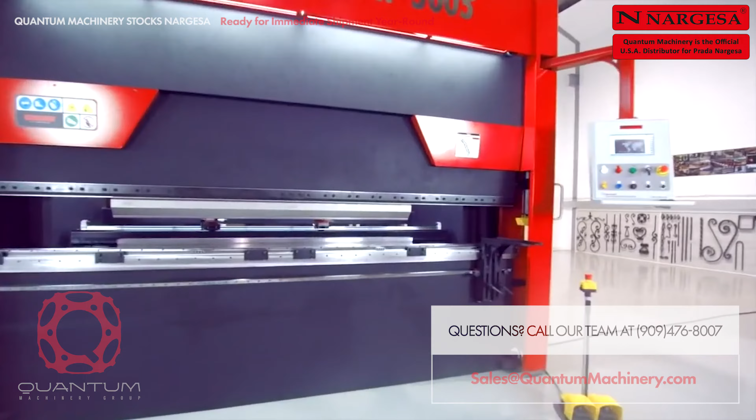Welcome to the new Nargesa folding tutorial video. We will show you how to make different parts and types of bending, such as air folding, deep folding, folding without marks, and even metal sheet rolling or calendaring.

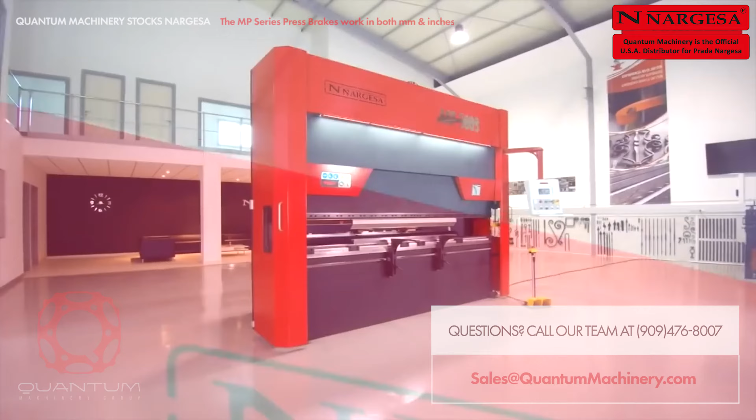We will also demonstrate how to choose the punches and dies, how to program the CNC, and how to interpret the folding tables, along with the points to take into account to achieve optimal folding operation.

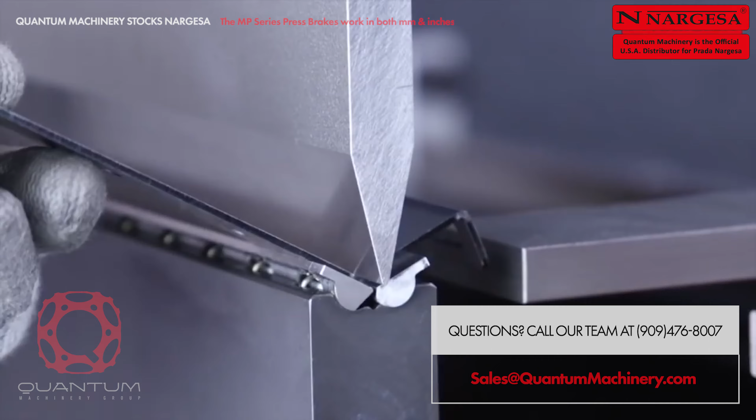All Nargesa machines have been designed, machined, and assembled in our facilities under strict quality controls.

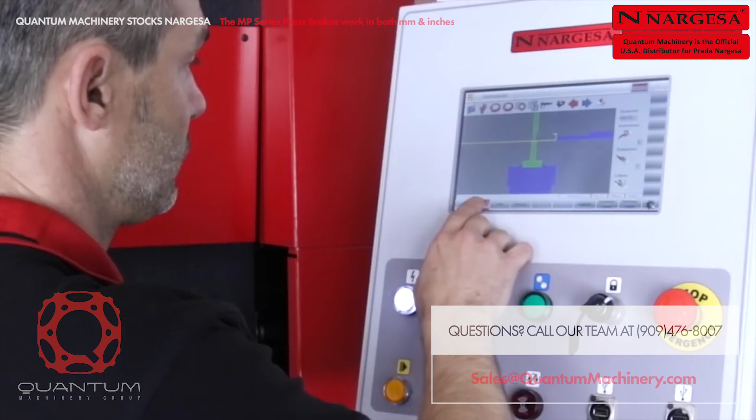We will begin this tutorial clip showing how to obtain this 6-part fold, all of them at least 90 degrees. Before starting to fold, it is essential to check this chart to determine the opening of the die that we must use. In this case, we know that the thickness of the sheet, indicated with the letter E, is 2 millimeters.

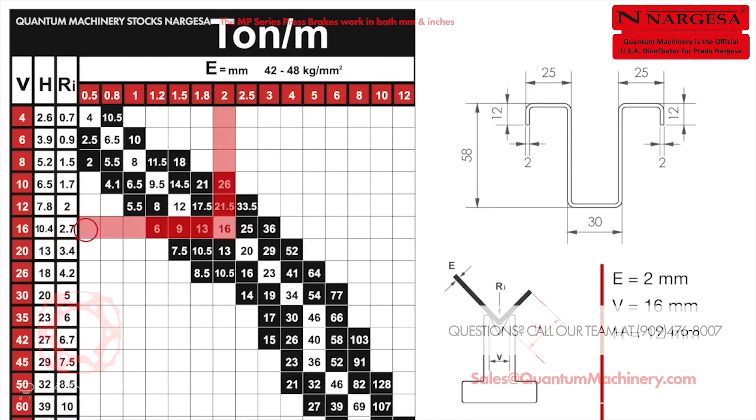For this thickness, a V of 16 millimeters is to be used. The letter H indicates the minimum folding flap, or minimum folding length, 10.4 millimeters. In this case, it is enough, since the minimum flap of the piece is 12. The letter R indicates the theoretical internal radius that we will obtain.

With 1 meter length, we will need 16 tons to make the folding, bearing in mind that it is a mild steel sheet, with a hardness of 45 kilos per square millimeter.

Now we select a punch that allows us to make this geometry. If the punch or the die that we have chosen does not allow us to make the part we need, the control of the machine will indicate a breakdown or collision as soon as we make the program run.

To create the program, we select New Program, New Graphic. Then we fill in the fields with the data we have taken from the drawing and the chart. We know that the width is 1,000 millimeters and the thickness is 2 millimeters.

As for the resistance of the material to bend, we will select values between 31 and 50 to work iron or carbon steel. Normally, it is 45 kilos per square millimeter.

We choose a die out of our library based on the marked requirements. For these parts with little distance between bends, it is advisable to use a die in T, because it is higher and narrower, so it will avoid collisions.

The reference of the die gives us all its features. The first figure tells us its height. The second one indicates the opening of the V, and the third one, the minimum degrees of the fold. We put it in.

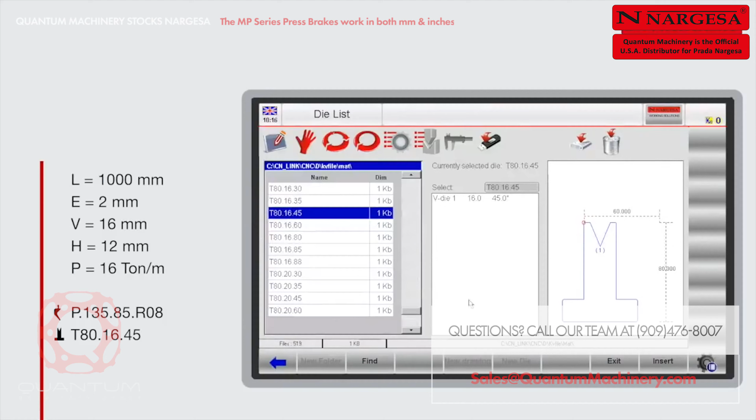Then we select the punch, taking into account its characteristics. The first figure indicates its height. The second tells the minimum degree of the fold, and the third, its radius. We insert it.

We begin to insert the dimensions of the geometry by one of the two ends of the piece, with the links indicated in the drawing. We insert the information in the fields in the upper right part of the screen. By default, it shows a distance of 20 millimeters vertically.

We press the up arrow on the CNC to indicate the direction of the first section of the piece and enter its height into the field L, 12 millimeters.

The next section is towards the right. We indicate it with the pointer by pressing this arrow. We introduce its dimension in the field L, 25 millimeters.

The next section is down, indicated by the cursor arrow. We introduce its size in the field L, 58 millimeters. We press the arrow to the right and introduce 30 millimeters in the field L.

Then we proceed with the arrow pointing upwards, 58 millimeters. We continue with the arrow to the right, 25 millimeters, and finally, down, to 12 millimeters.

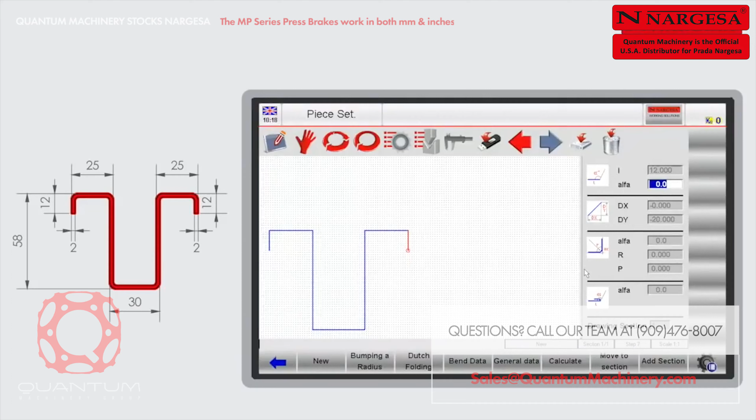Then we press the Calculate button, and the simulation appears on the screen. We press Optimize, and the CNC performs the calculations to find the optimal solution, avoiding collisions and reducing the number of operations. The CNC will indicate when it finds the solution.

We confirm and press Simulate, so we can visualize the whole process in the simulator step by step.

It also shows us the development, which means the total length that the sheet to fold must have, the number of upsettings, and the rotations that we will have to make during the folding process.

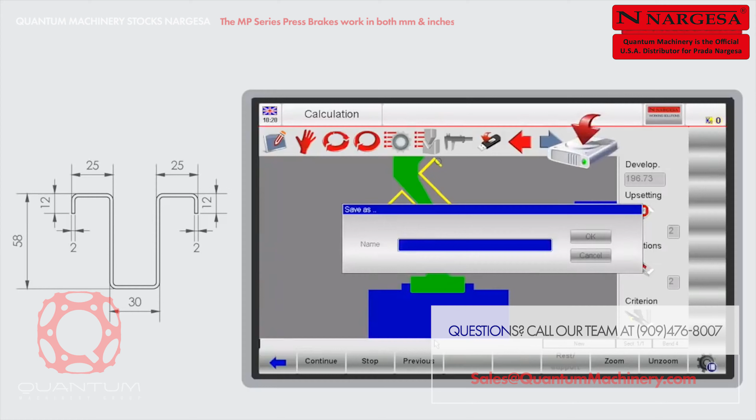We save the program with the name Demo 1. We accept, then we press the button Programming to display all the features of this part on the screen.

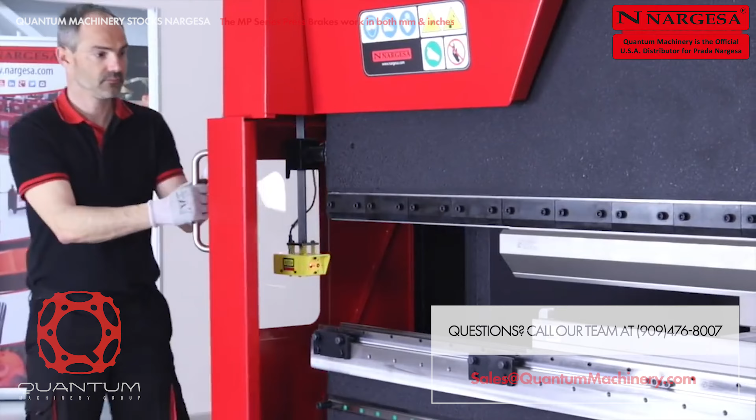We place and fix the punch and die to the press brake. We adjusted the lasers 8 millimeters below the punch as a safety measure. We unlock the emergency stop button, reset the safeties, and operate the machine in manual mode. For achieving a proper operation and durability of the punch, it is essential to fix it correctly.

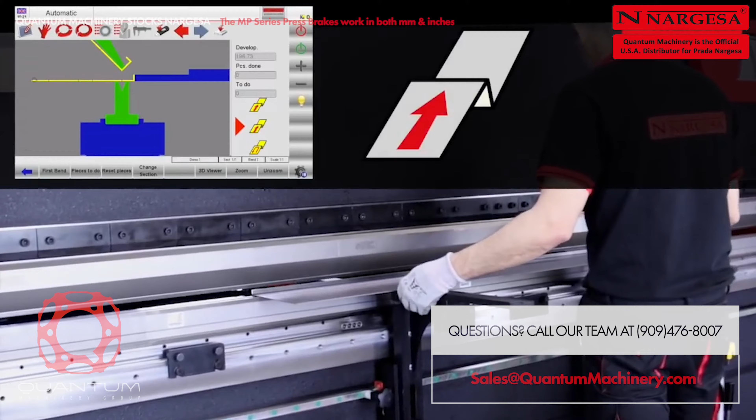We activate the machine in automatic mode to execute the program. As we make the folds, the screen shows how to place the metal sheet for the next operation. This symbol indicates that we introduce the plate by the same side that we are already folding. We continue on the opposite side of it. To finish, we rotate the piece, introducing it by the same side that we are working.

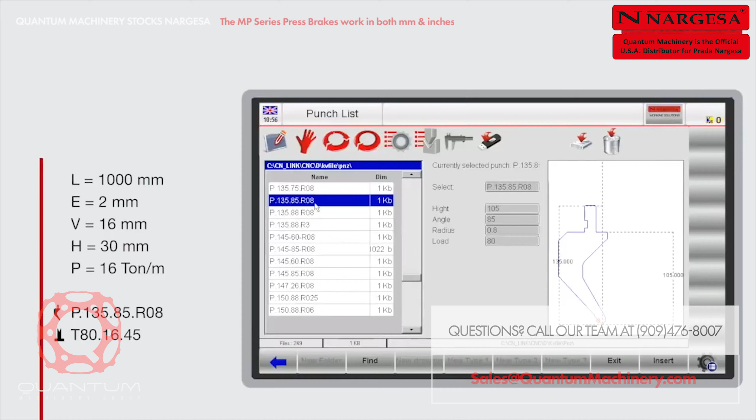We choose the same die and the same punch as in the previous parts because the minimum distance between folds is still small. We confirm. Then, we put in all the sizes of the geometry in the corresponding fields.

We will start at the bottom end of the piece. We insert the dimensions of the first section, 50 millimeters. In the cursor window, we press the down arrow to indicate the direction of the fold and enter its height in the field L, 30 millimeters.

The next section is to the left. We indicate it with the cursor by pressing this arrow. We introduce its dimension in the field L, 110 millimeters.

The next section is up. We indicate it with the arrow. Next, we introduce the dimension in the field L, 185 millimeters. We press the arrow to the right and introduce the 110 millimeters.

We proceed with the down arrow, 30 millimeters. Finally, with the arrow to the left, 50 millimeters.

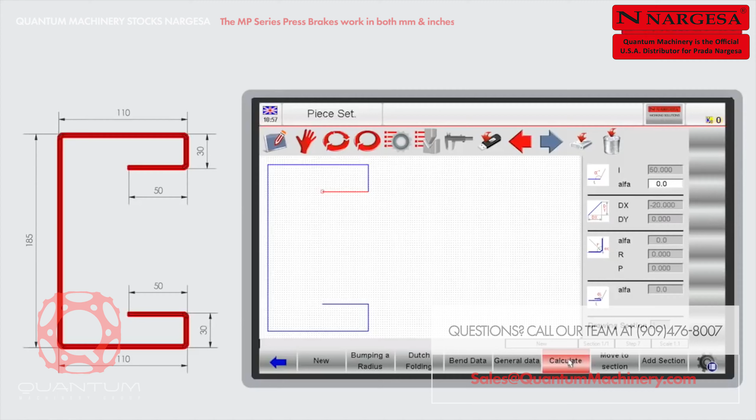Now we press the button Calculate, and the simulation appears on the screen. We press Optimize, the CNC finds a solution, and we confirm. Then, in order to see the whole process, we just press Simulate, and it will run from the very beginning.

The development will allow us to know that we must cut the metal sheet to 541.73 millimeters to be able to fold this piece with these dimensions. In the process, we will make one turn and one rotation. We save the program on the disk with the name Demo2. We confirm. Then we press the button for Automatic Mode to execute the program.

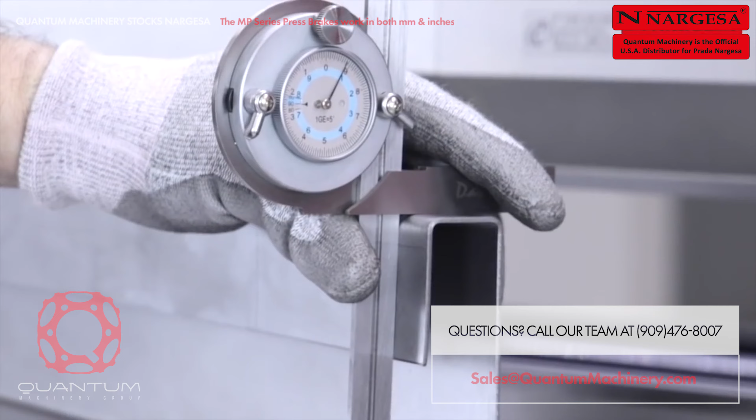There will be some moments, and due to the tolerance of the materials, when it is possible that the folding angles need a correction. To correct this disparity, we will insert, in the corrections field of each fold, the number of degrees that we need to correct.

In this case, all the folds have been at 91 degrees. We will enter the value 1 negative in the first fold, and we will use the arrow in the menu to go to correct the next fold and so on until we have the 6 bends corrected.

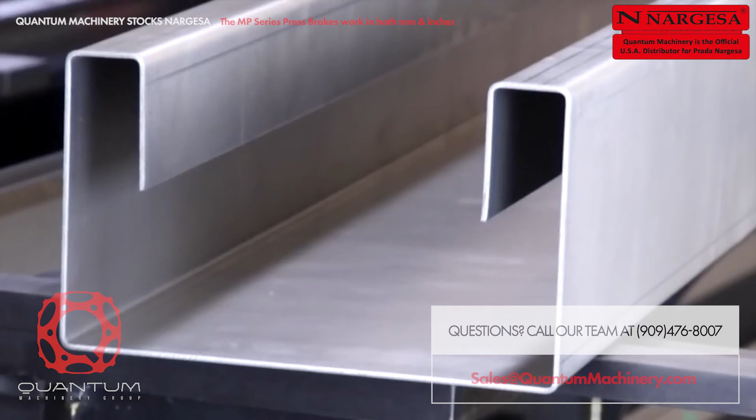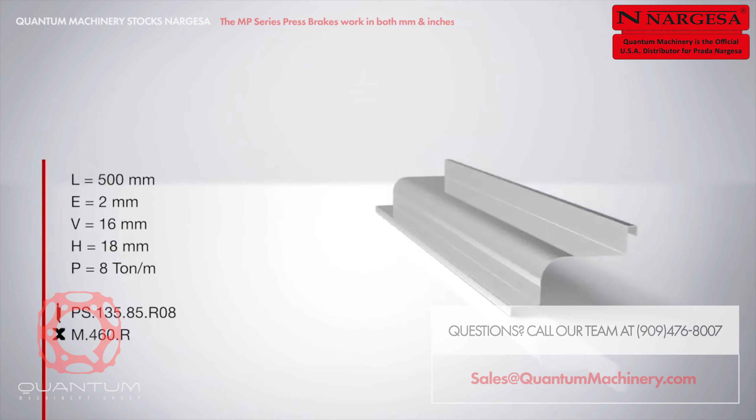We will replace the punch and the die to make the calendered operation. The calendering is a type of folding that allows us to obtain different bending radii in a sheet from multiple sequential bends.

We introduce all the information of the material to fold. For stainless steel, we select a value of 50 kilos per square millimeter.

We will use a multi-V die because the width of its base will provide us with more stability. We must indicate the slot that we will use. As we have already seen, the optimum slot for 2 mm sheet is the V of 16.

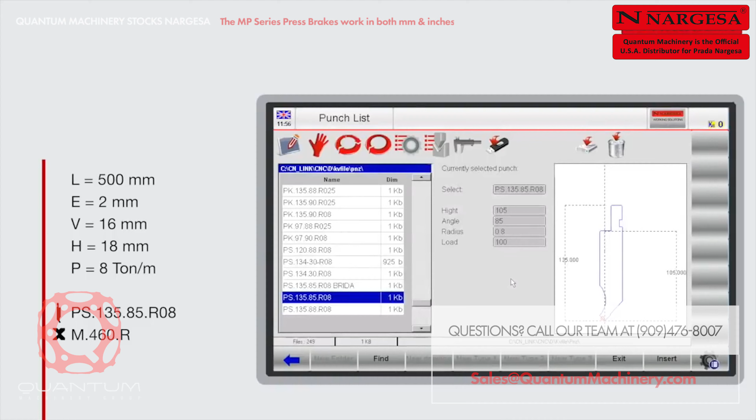Whenever the piece to obtain allows it, we will use punches that work on its vertical axis. These kind of punches have a better resistance to pressure because, unlike the previous punch, the axis where the force is made is solid.

We proceed to enter the dimensions of the piece by pressing the up arrow of our keyboard to indicate that the first section is vertical.

In order to program the calendaring operation, we press the Bumping a Radius button. By default, we see this direction of 90 degrees, a radius of curvature of 15 millimeters, and a distance between each fold of a sequential pitch of 3 millimeters.

We enter the data for our calendaring. The direction is already correct. As for the curvature radius, we enter 40 millimeters. And finally, we put a length of 5 millimeters between fold and fold.

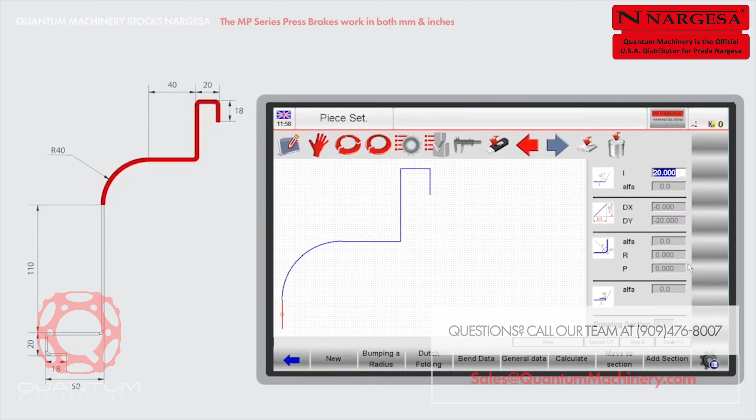We choose this length depending on the type of finish we want. The less distance we leave between the folds, the better the curve will be defined and finished.

In those cases in which it is possible that the sheet does not get to be placed correctly and falls, we can use the support of the gauge needles to hold it during this operation. This eases up the folding process.

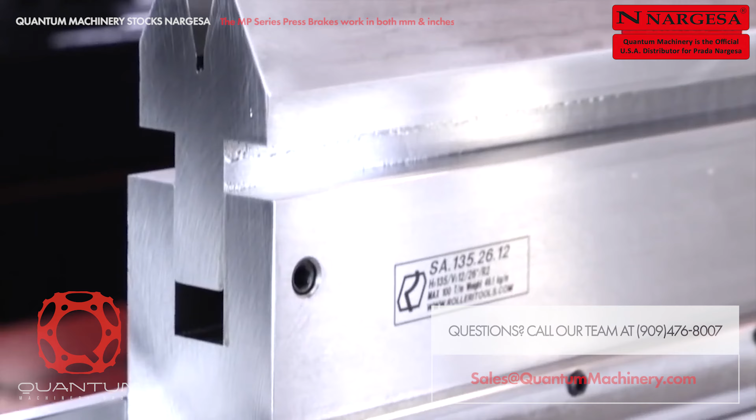We place the swinging die with springs to make bends of 180 degrees. These dies have got two folding areas. In the first zone, we perform the previous folding, obtaining a more closed angle of 90 degrees, and in the second, it makes the Dutch folding to 180 degrees, or crushed down.

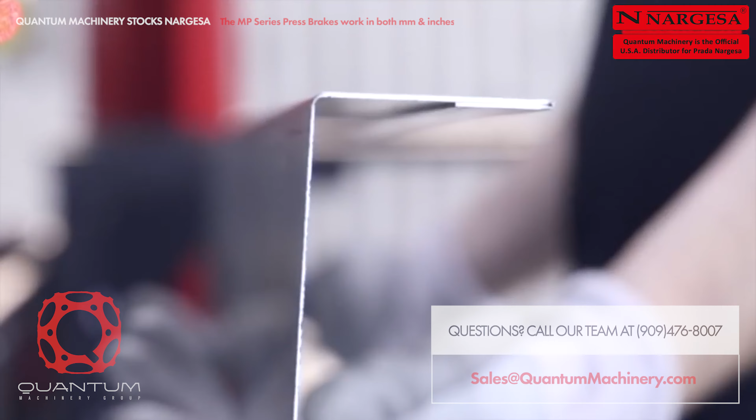We are going to make this especially complicated piece, and we will check that it is really the control of the machine, the one making all the job.

If we want to program this type of folding, we proceed in the same way, entering the material information.

We insert the die of 26 degrees and with the one V of 12, indicated for sheets of 1mm. To be able to do the deep folding, we must use a punch with the same degrees as the die, in this case, 26 degrees.

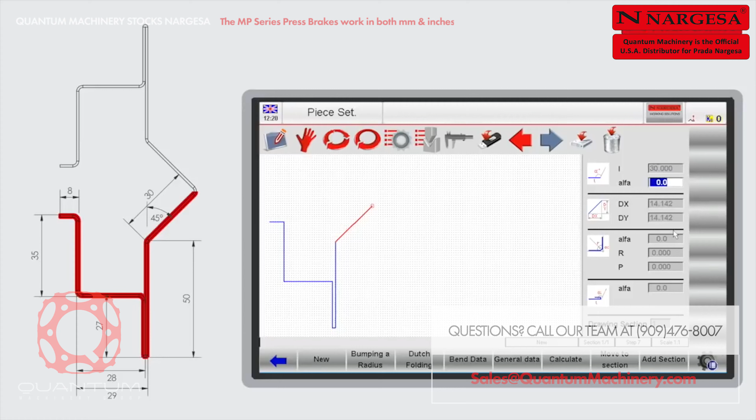We also specify the direction of the next fold with the arrow of the cursor, forming an angle of 90 degrees.

In the next deep fold, we proceed in the same way by pressing this button and indicating an angle of 60 degrees.

When we order the machine to make the optimizations, the CNC has control on the gauge movements. We observe perfectly the movements of the x-axis of the gauge on the simulator. This x-axis is the one that moves forward and backward. We can also get to see the movement of the r-axis, which moves up and down.

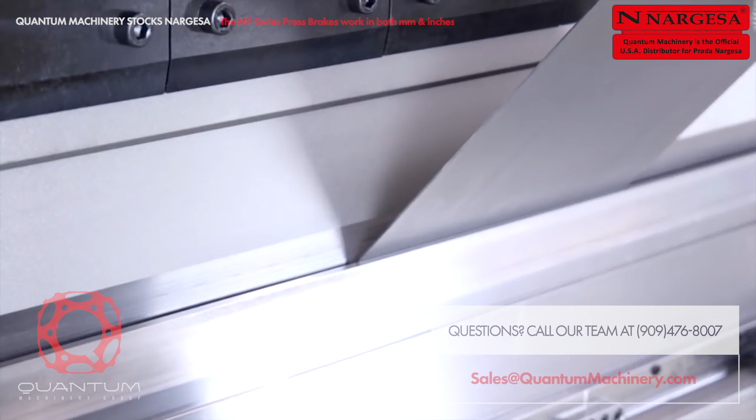The press brake CNC calculates and performs automatically all small movements of the gauge. If it senses that the piece will collide with the rear gauge while making the folding operation, it will move it away some millimeters to avoid this collision.

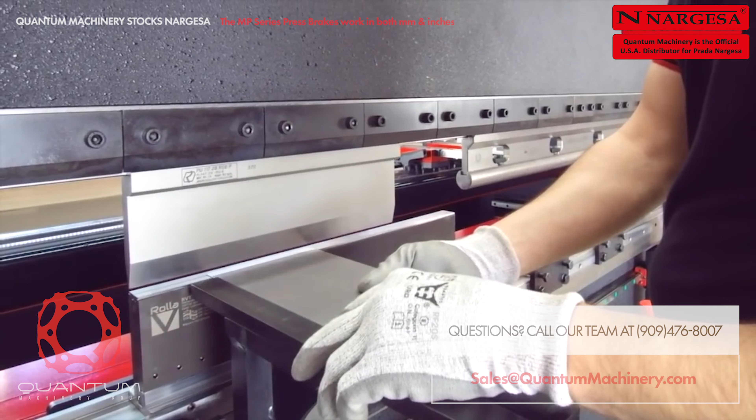The Rolla V die is the ideal tooling to solve the folding with a minimum flap. Its shape adapts to the piece while folding, spreading the pressure evenly. In this way, we obtain results that would be impossible to achieve using a single tooling.

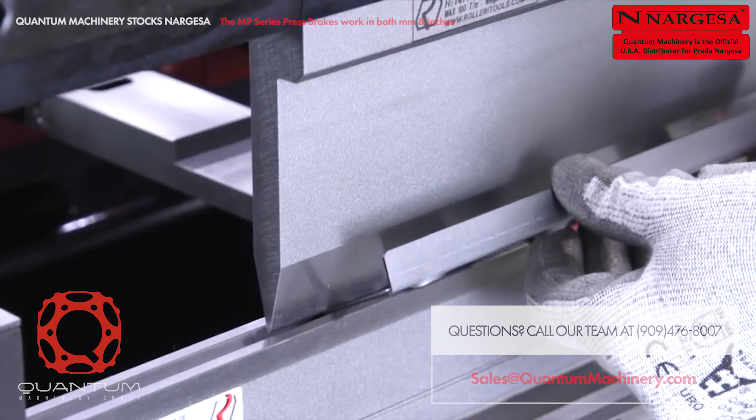The shapes or holes in the sheet become a shortcoming, especially when they are inside or near the working trajectory, because the folding process would deform any cut or hole on the sheet that is on the working line.

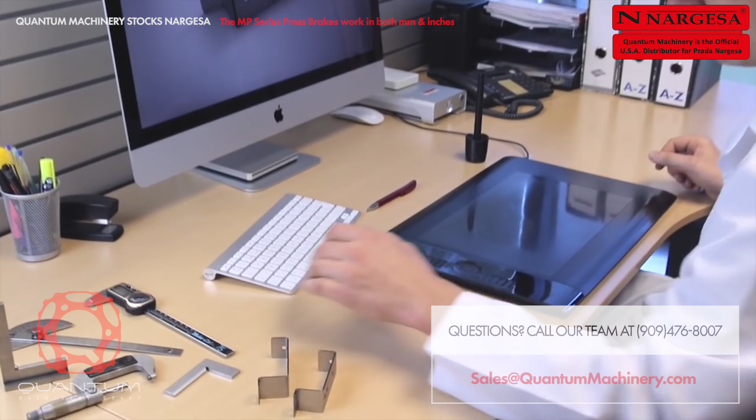The finished qualities of this type of folds are perfect. We can see it in the following examples: a folding operation using a conventional die, and the other with the Rolla V die.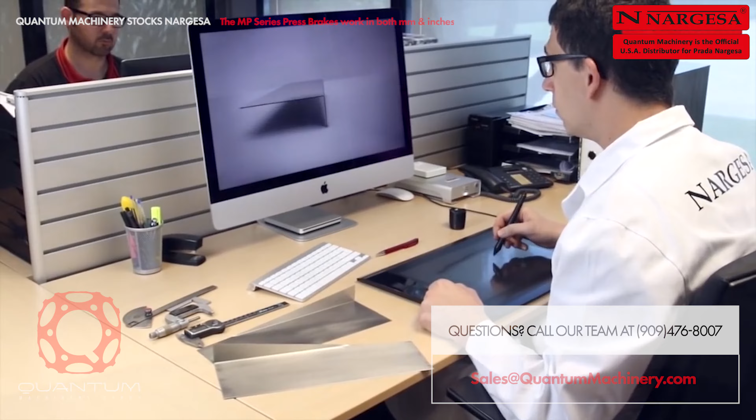There is the same problem with the minimum flap in diagonal folds, which we can solve if we use the Rolla V die. The characteristics of this die are optimal for folding polished stainless steel sheets, so we will obtain a marks-free folding result, 100% guaranteed.

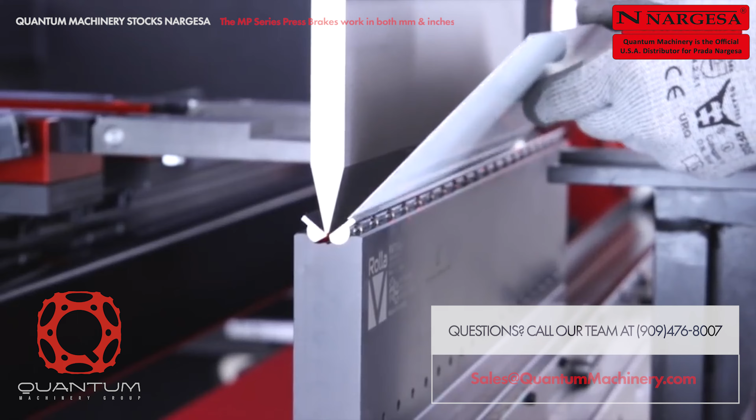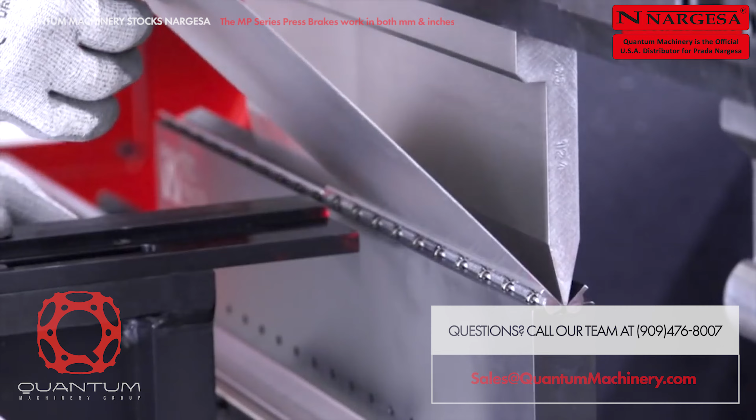The length of the fold of the MP3003 CNC enables us to place several punches and dies to perform different operations at the same time, which opens up the door to different workstations so all the piece will be finished in a single manipulation. In the first zone, we will make the fold of the minimum wing with the Rolla V die, and in the second zone, we will perform the fold with a punch for a big radius.

These punches are fixed to the end that can be placed on the machine and allow us to make these bends with different parameters just by changing the end of the punch.

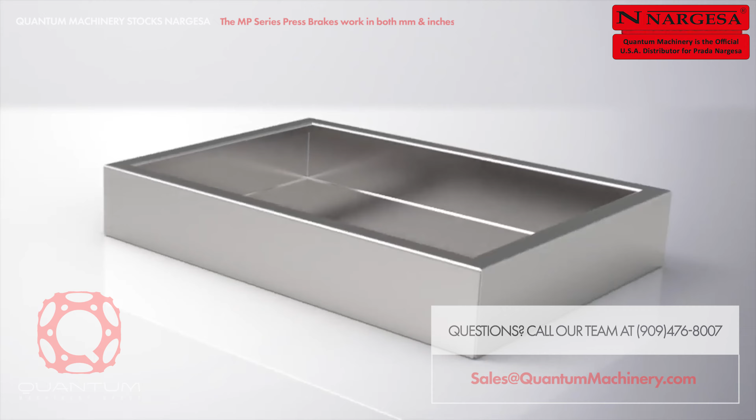All punches and dies can be supplied in a sectioned version. This feature is essential to develop parts with two or more sections, such as trays or boxes, in which the folding axes are perpendicular. We put the anvils in both ends.

Its shape, with longer length in the lower part, will allow us to make the folds that will close the piece. We select the different sections of the punch so that their total length is less than the size of the largest fold.

In this case, the largest fold is 400 millimeters, and we will place the punches so that their total length is 390 millimeters. We will always bear in mind the largest fold, because that way we will make sure the punch length is enough to perform all the folds of the part to obtain.

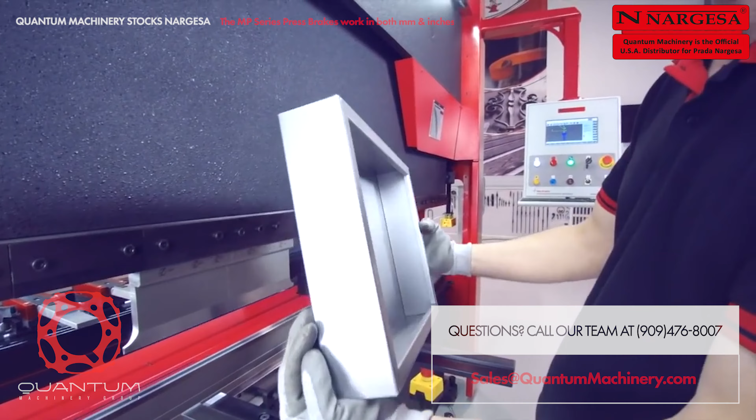For the programming of the folding of boxes, we will generate two sections. For inserting the information, we can begin with either of the sections indistinctly, because it will be the CNC that indicates the order of the folds.

In this case, firstly, insert the dimensions of the 300 mm section. It uses a T-shaped die with a V of 10 mm, mostly recommended for 1 mm thick sheets.

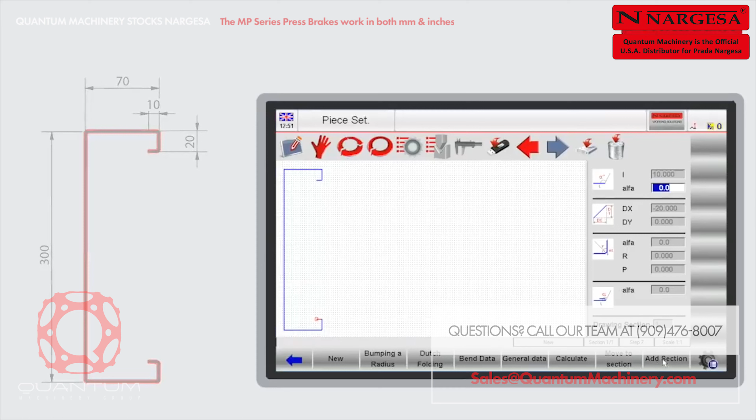Once we got all dimensions inserted, we press the button Add Section and then the button General Data. It shows up a chart we must complete with the data of the second section. We will only modify the length because the other information is the same as in the previous section. We proceed to the introduction of the dimensions.

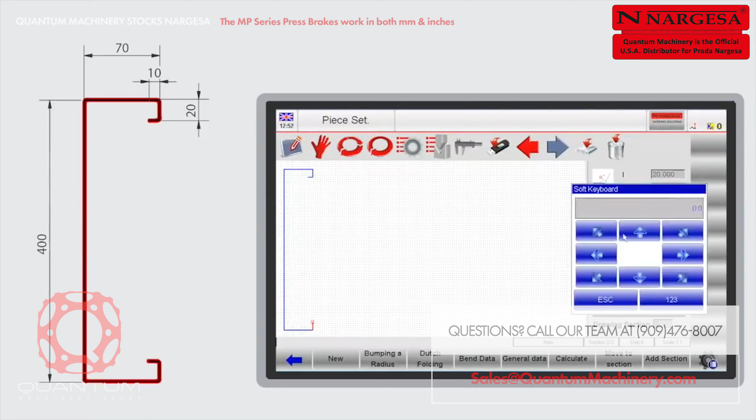We press Calculate and then Optimize. The CNC will indicate that we have found a solution. Press Simulate to see the process.

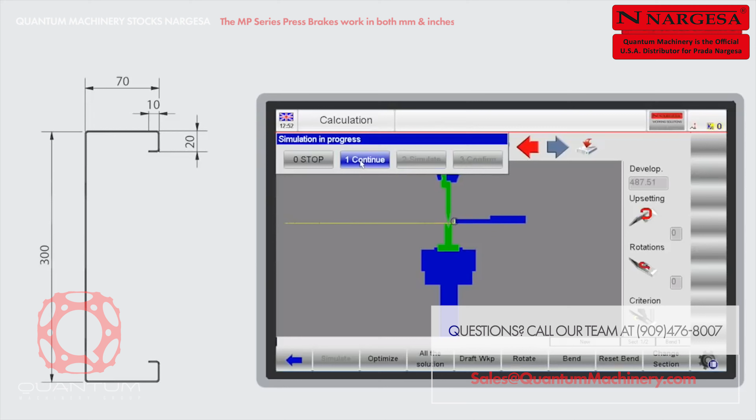The simulator indicates the development and the section number at all times, section 1 of 2. We confirm to see the simulation of the second section of the piece. Like in the previous pieces we have made, it shows the development and the section number, 2 of 2.

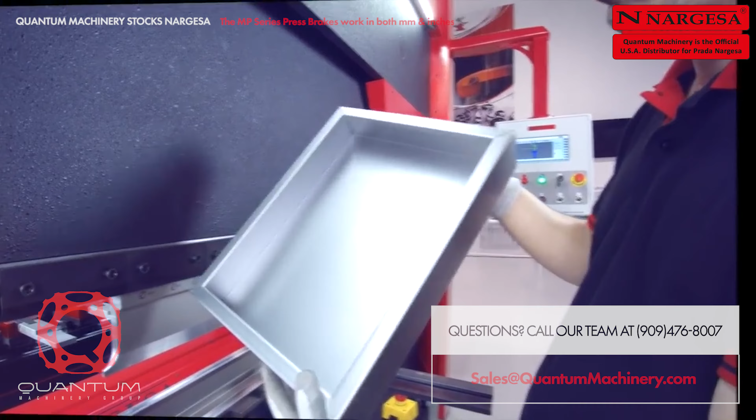For folding without marks with a conventional die, we suggest the use of this protective film that we place on the tensors, which fix at the same time to any die. This material eliminates friction between the metal sheet and the die, obtaining a result without marks, optimal for stainless steel, aluminum, and delicate materials such as brass and copper.

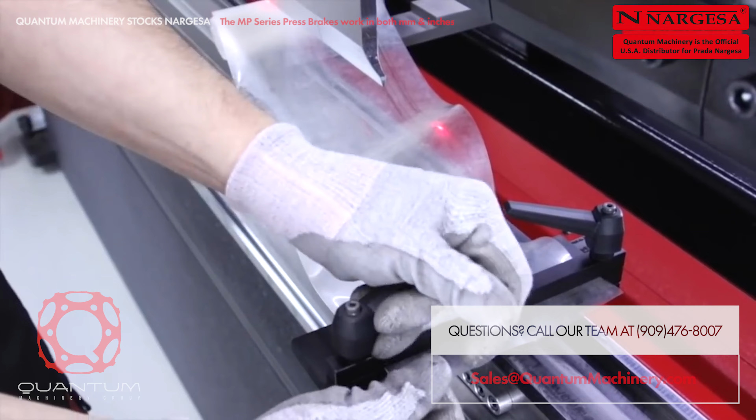It is essential to add up the thickness of this plastic film to the sheet thickness in order to program the piece where we will use it.

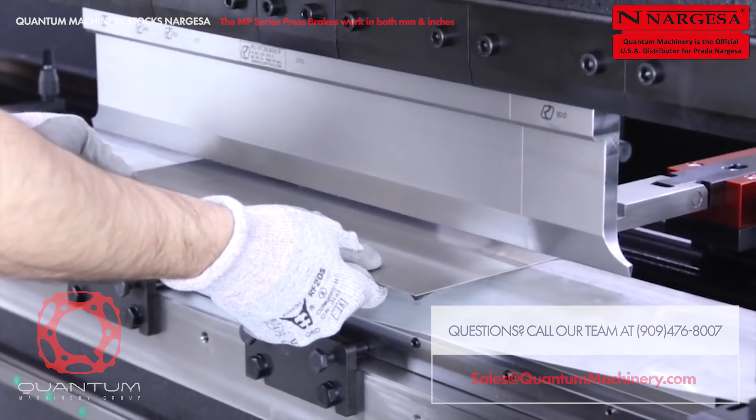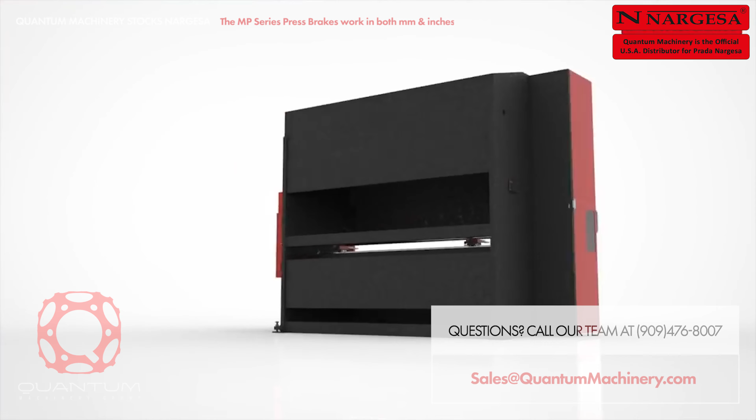We check that once we have removed the protective plastic film, we really obtain a folding without any sort of mark. The press brake MP3003 CNC Nargesa has a welded frame, stabilized, and with high-precision machining.

The large neck enables the folding of large pieces. It has LED lighting incorporated in the folding area, centralization of all hydraulic components in a single block. One laser security barrier is also integrated as a safety device.

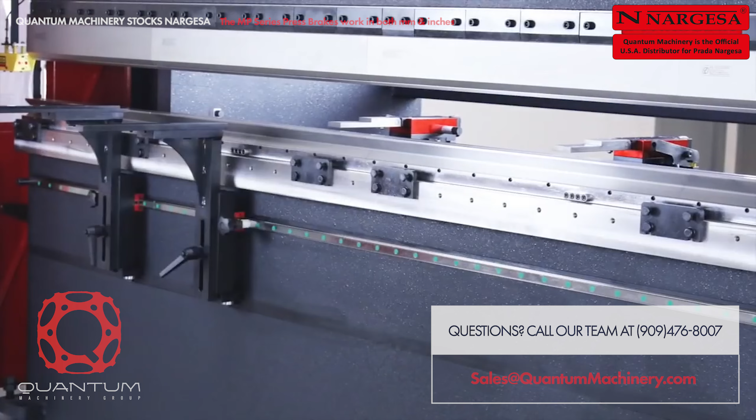The clamping system for the punches is Promicam, with sliding arms for optional support of the sheet. Folding side doors facilitate the change of tools, with a multilingual interface featuring more than 20 languages available.

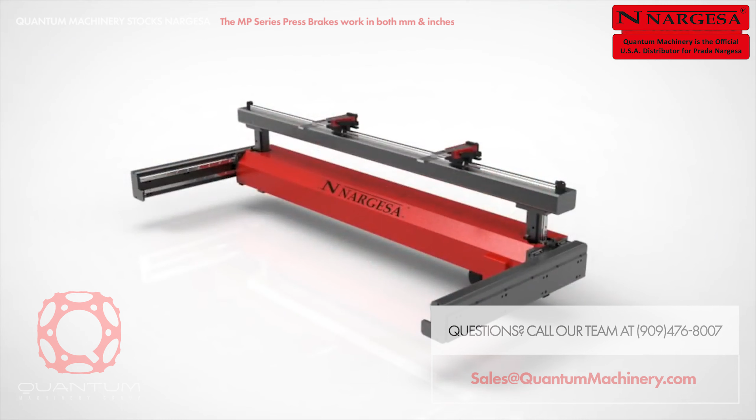In this chart, we will show you the different axes that can be incorporated in the press brake. These axes can be activated manually or automatically. The X and Y axes are supplied as standard with the machine. These two axes are enough to make a large number of pieces.

However, sometimes the geometry of the piece to fold requires the use of the R axis. This axis allows us to use the gauge at different heights in a much more dynamic way to perform the operation. The incorporation of this axis to the machine implies, most of the times, the main difference between being able or not being able to obtain one piece.

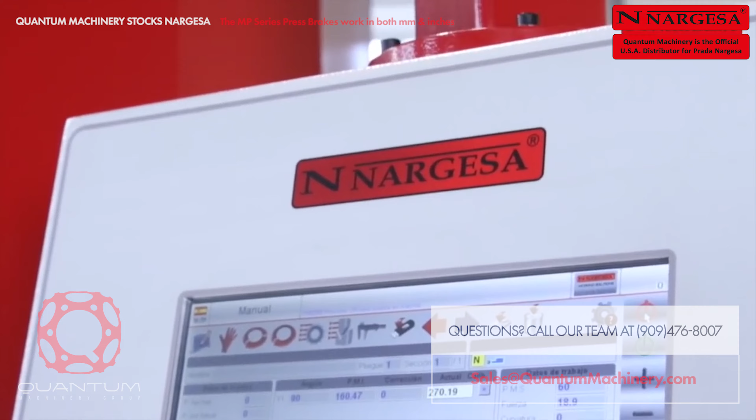The powerful CNC control ESA S630 is the core that rules all the systems and solves out the most complex bends. All these features allow any untrained operator to use the machine, because the control is the one that calculates whether the piece can be made or not.

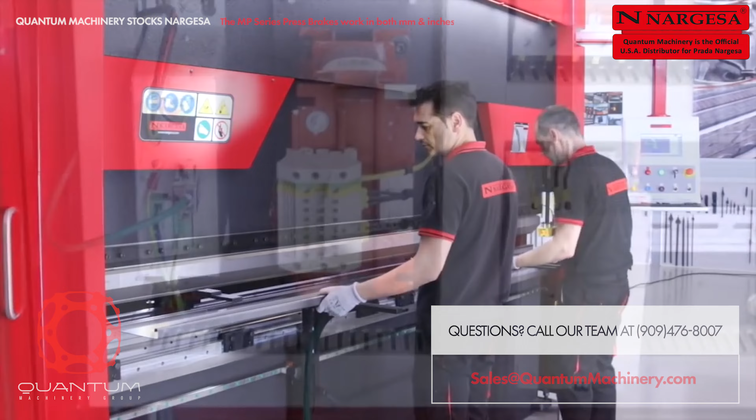It also programs the fastest sequence, counts on the gauges, and indicates at all times the movements and steps to follow by the operator. This press brake MP3003 CNC Nargesa includes an Ethernet port that will make possible any control, management, software update, and diagnosis locally and remotely.

With the explicit customer's authorization, any Nargesa engineer will be able to access the machine from a distance, which will represent an increase and improvement in the after-sales service and technical assistance that our brand, Nargesa, offers in all the machines that we manufacture.